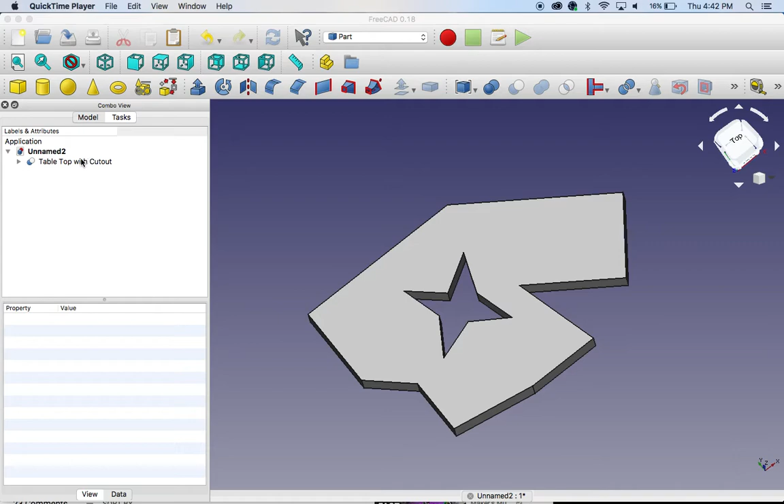When I want to add the legs, I'm going to repeat what I did for the last step. Now I've got my tabletop with a cutout. Before I add any kind of sketch, I have to make sure I'm in my part design.

We need to select this option here and create a new body. I'll call this leg 1. I'll zoom out because for some reason I like zooming in. I'm going to use spacebar to just get rid of the tabletop for right now.

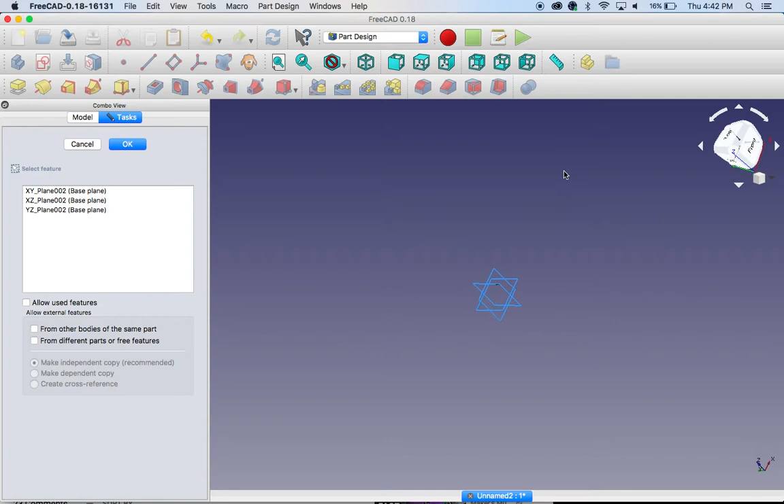So with choosing my leg, let me sketch it. In this case, I don't want to view from the top because the legs most people are going to see probably from the front. So if I zoom in here, the front is the XZ plane. I'm going to work within that plane.

One of the things we need to do is figure out how tall these legs should be. Let's assume maybe 2 foot high table legs would work. So let's first do this. I will go straight up.

And then, I don't know, we'll give it kind of a weird shape. And connect. There we go. Oh, messed that up. Oh gosh, everything's falling apart.

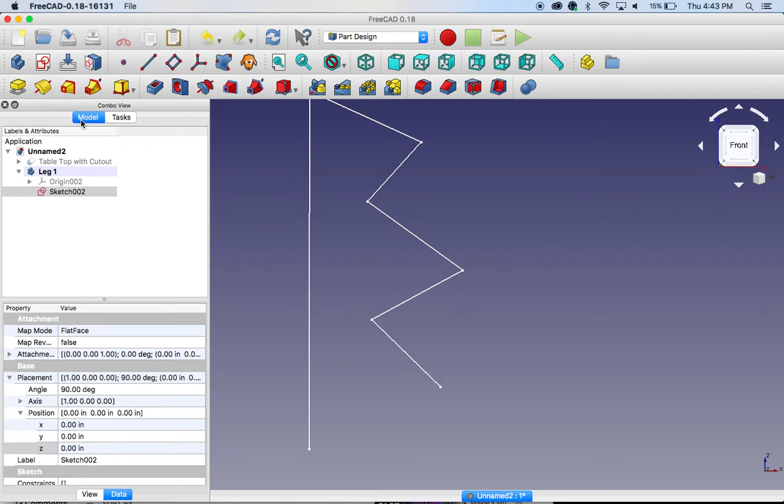Okay, so I'm going to undo. Let me go undo this sketch. I'm going to get rid of this sketch altogether. That was a mess, so I'll add the new sketch.

It is going to be the XZ plane. Zoom out a little bit. You have to be really careful and make sure that when you click that final point, you do get the yellow. Otherwise, you see what happened. So I'm just going to go ahead and make this again, and make sure you click when it is yellow. Okay, now we're good to go.

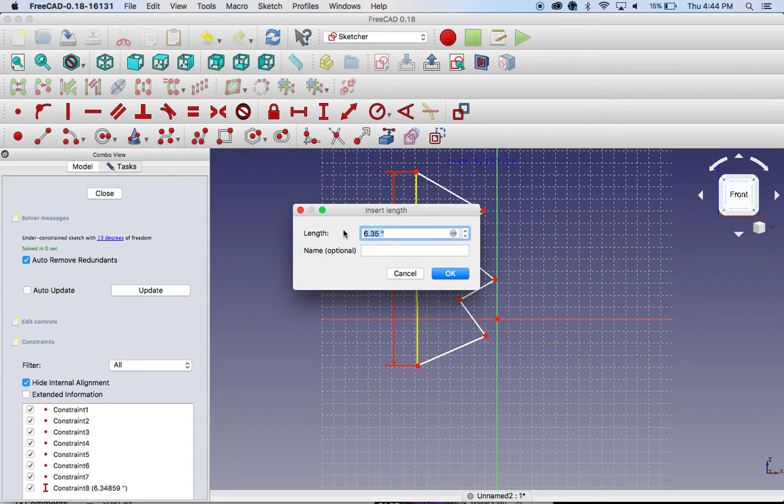All I'm going to do for this one is choose this dimension. I just realized that my table is in inches, so I'm going to make this like 6 inches. You should make yours in feet, but unfortunately mine is an extremely small scale model. If this is my leg, then I'm going to hit close.

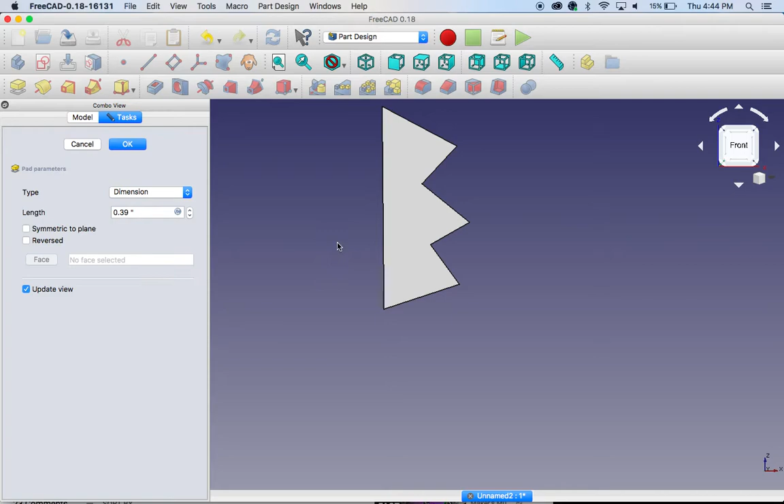So now I've got my leg, but I need to extrude it. If I want to look at the leg, let's say the leg maybe needs to be 1 inch wide. Hit OK. All right, we'll bring the tabletop back with spacebar. Okay, so that doesn't look too bad.

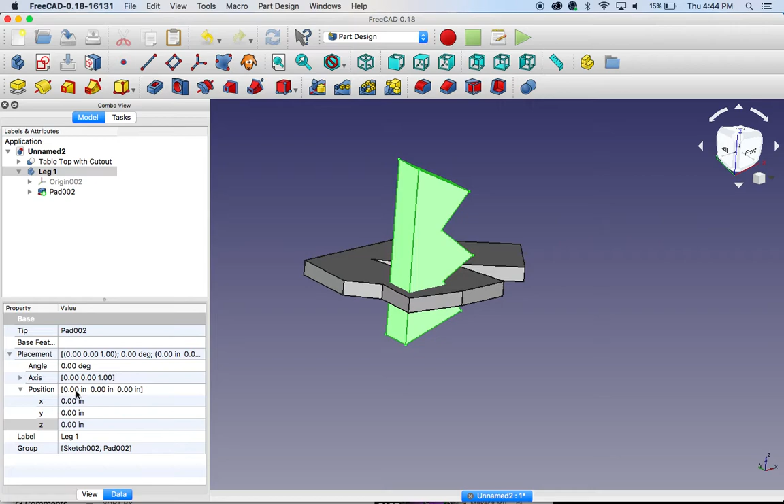So what I need to do now with this leg is reposition it. Let's say in the Z it needs to go down a little bit. Move a little bit more than that, maybe 4.25, maybe 4.4. 4.4 works. If I zoom that around, that's probably a good spot to put the first leg. So I've got the first leg there, which is good.

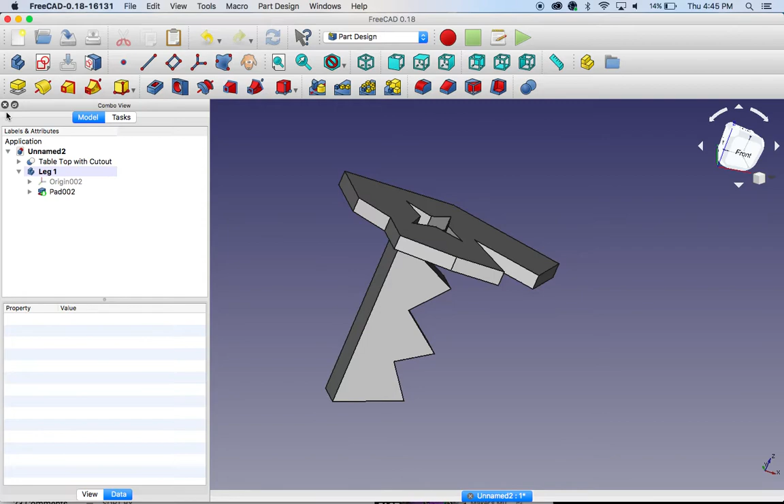All right, so that's how we're going to add that leg. If I want to repeat that process, I'm going to do the same thing 2 more times. I need to create a new part and rename this leg 2.

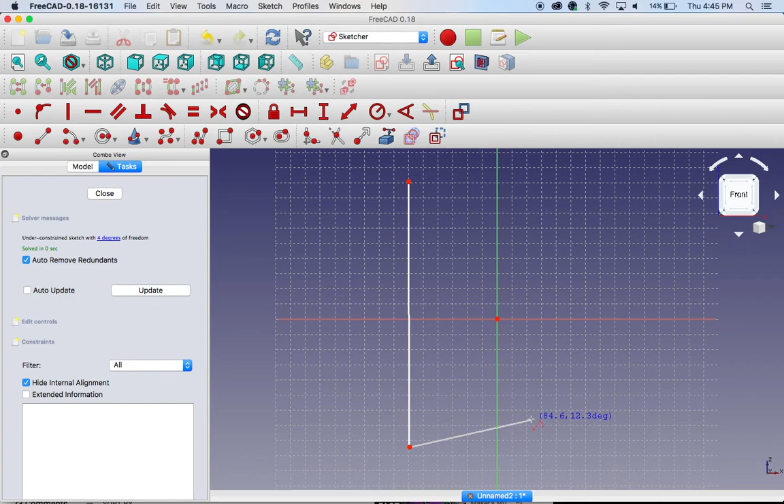I'm going to turn off the others with spacebar, and go ahead and add my new sketch. We still want to view this from the front, the XZ plane. Now we know it should be as tall as the other one, so I'll make sure one of my dimensions is around 6 inches, and maybe do something that looks like this.

It's kind of weird looking. I'll make it flat at the top. All right, so if I want to be flat at the top, I want to make that flat. That seems pretty good. Let me make sure that this is 6 inches, and let me make sure it's completely vertical. All right, that seems pretty good, so I'm going to hit close.

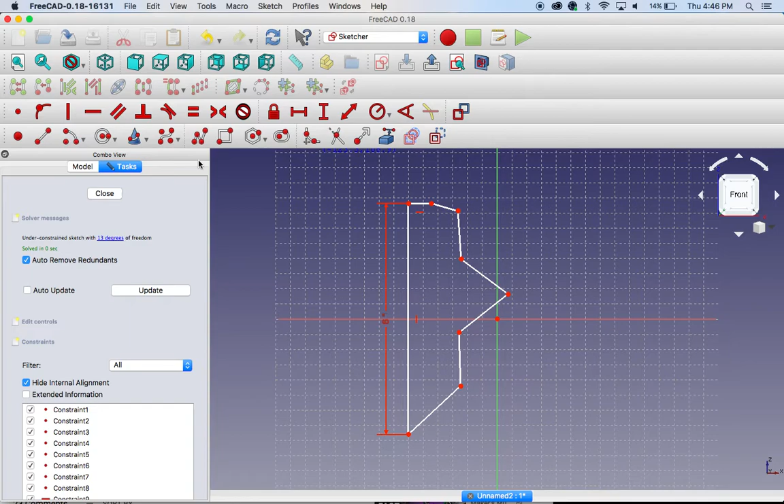Zoom out, and let me extrude that. Just like the last one, I'm going to make it 1 inch thick. So now I've got my second leg, and it's just a matter of, if I turn everything back on, it's a little bit too high now.

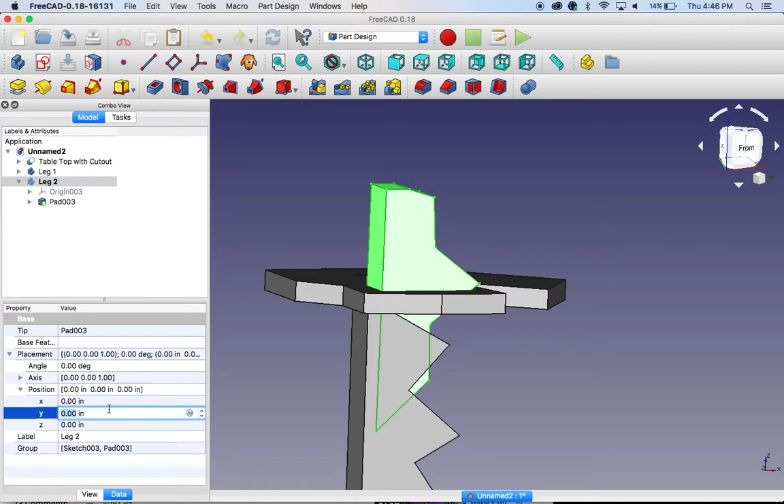So it's just a matter of taking leg 2 and moving it. I think we need to move it a little bit in this direction, so we'll move it along the Y. Oops, wrong way. How's that look? It's a little bit too far, so I will maybe make that 2.8. 2.8 seems pretty good.

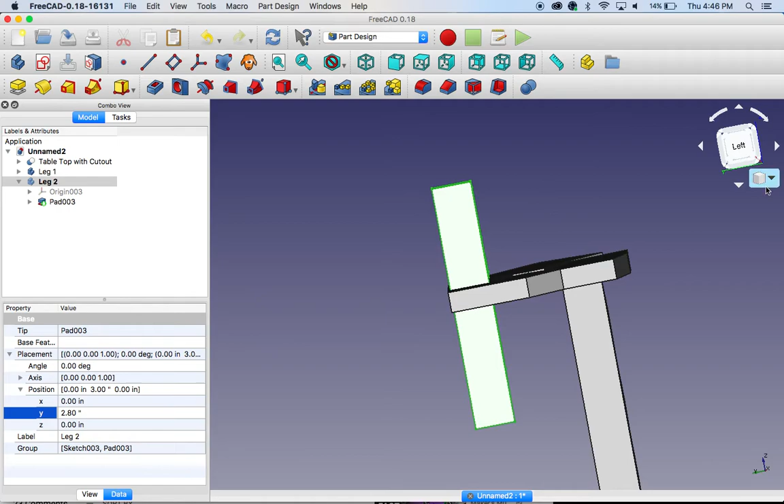So then in the Z we'll move that down. That looks pretty good. All right, so we've got 2 custom legs, and we've got a custom table with a cutout. All I need to do is repeat that process to add my third leg, and I should be fine. So it's up to you to figure out how to add that third leg, but good luck with it.

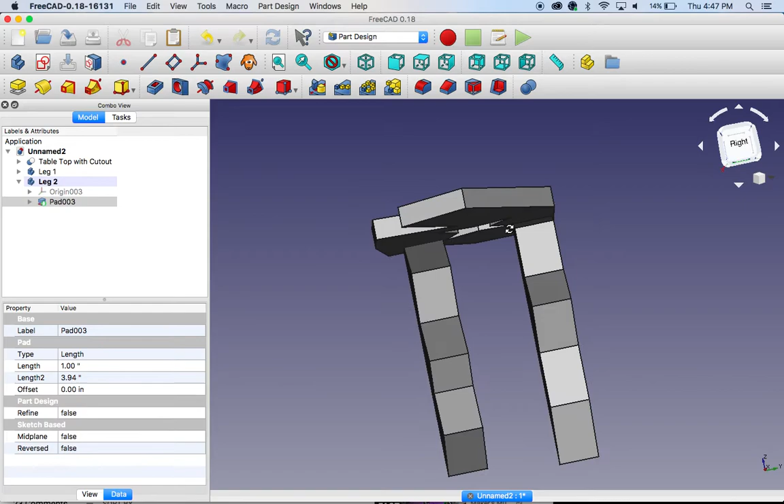Actually, these table legs are a little bit apart, so I'm going to go ahead and try to move this up along the Z. Whoops. I'm going to try moving it up, let's say negative 3.2. Nope, negative 2.8, that seems a little bit better.

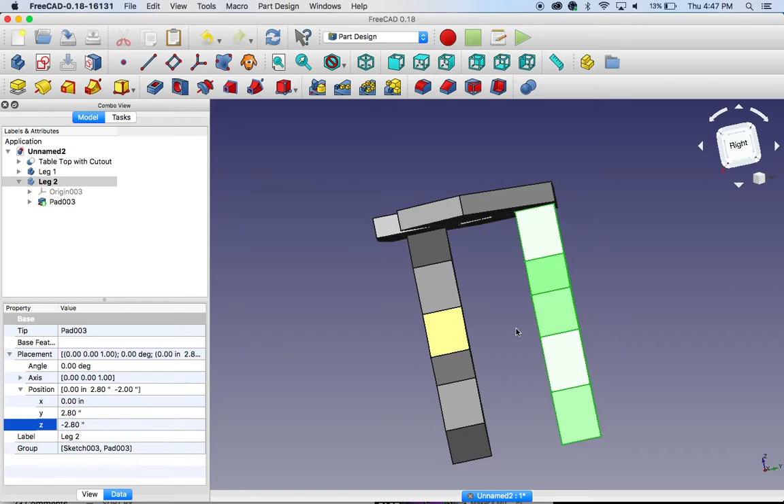So now if we take a look, I just noticed real quick they were uneven. So now if I view that from the right side, they're still a little bit uneven, and I'm a perfectionist, so let me try 2.7. 2.7 looks pretty good—not sticking out the top, and they're even on the bottom. So that should be good to go.

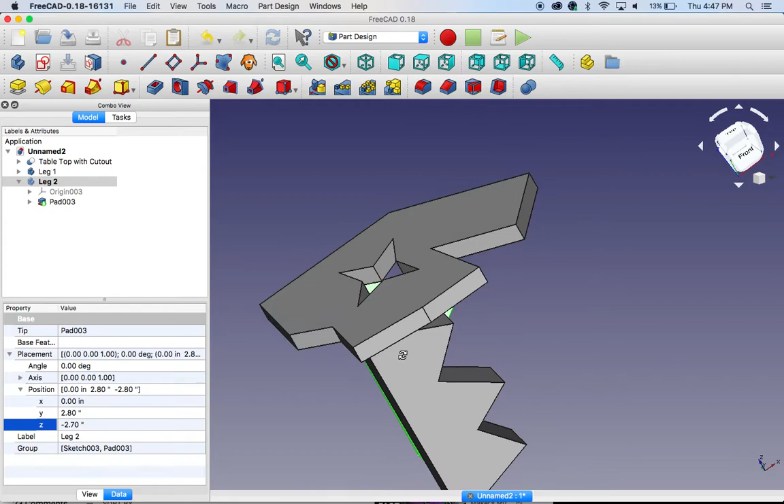Okay, so you'll have to figure out how to add the third leg, but good luck—you just have to repeat the last two steps.